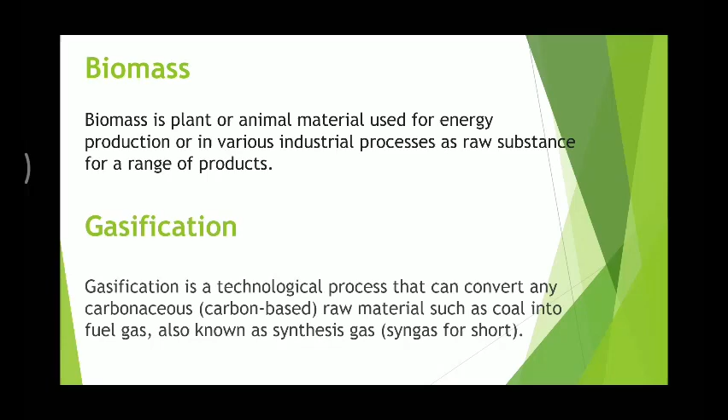Biomass gasification. Biomass gasification means incomplete combustion of biomass, resulting in production of combustible gases consisting of carbon monoxide, hydrogen, and traces of methane. This mixture is called producer gas. Producer gas can be used to run internal combustion engines.

Both compression and spark ignition engines can be used; it can be used as a substitute for furnace oil in direct heat applications and can be used to produce methanol in an economical way. It is an extremely attractive chemical which is useful both as fuel for heat engines as well as chemical feedstock for industries. This gas is a low heating value fuel with a calorific value between 1000 to 1200 kilocalorie per normal meter cube.

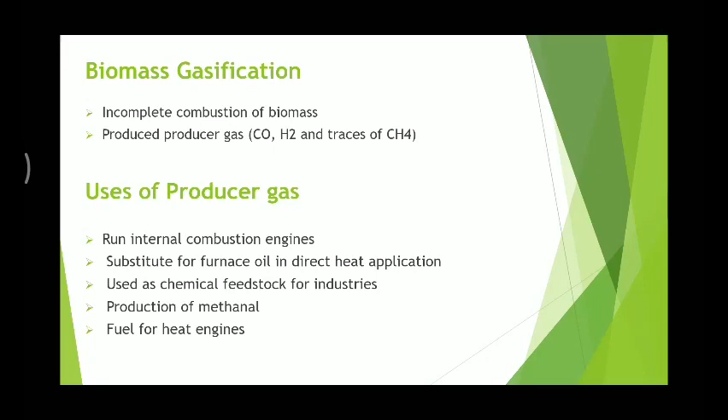The main reactions or processes which occur inside a biomass gasifier are drying, pyrolysis, oxidation, and reduction. Drying. Biomass fuel usually contains moisture. When it is heated to about 100 degrees Celsius, the moisture is converted into steam. Pyrolysis. Pyrolysis is the heating continuously without supplying any oxygen. As a result, the biomass is decomposed or separated into solids, liquids, and gases.

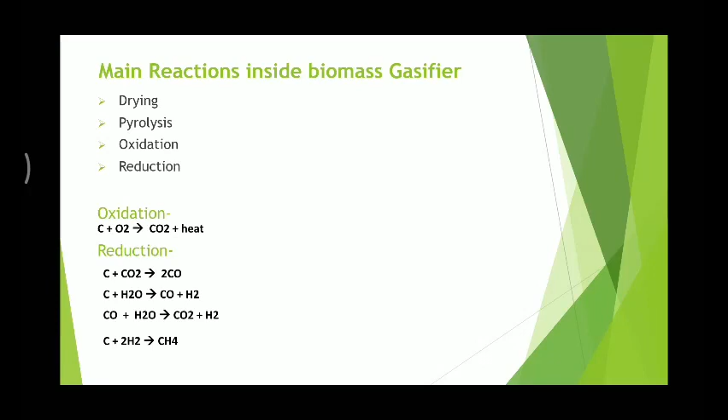Oxidation. Air is introduced into the gasifier after the decomposition process. The reaction is carbon plus oxygen to give carbon dioxide and heat. Reduction. Reactions for reduction are like carbon plus carbon dioxide to give carbon monoxide, carbon plus water to give carbon monoxide and hydrogen, carbon monoxide plus water to give carbon dioxide and hydrogen, carbon plus hydrogen to give methane.

Now let's talk about types of gasifiers. There are generally four types of fixed bed gasifiers used in biomass gasification. They are updraft gasifier, downdraft gasifier, open-top gasifier, and closed-top gasifier. For the shortage of time, here we will talk only about updraft and downdraft gasifiers.

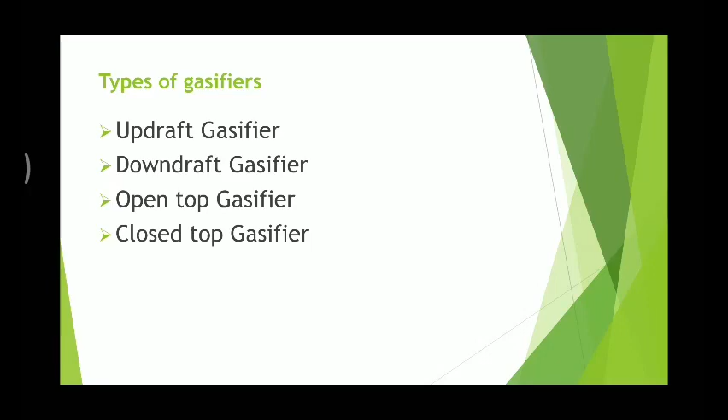Updraft gasifier. In this, air is taken in at the bottom and the gas leaves at the top. Near the grate at the bottom, the combustion reactions occur, which are followed by reduction reactions higher up in the gasifier. In the upper part of the gasifier, heating and pyrolysis of the feedstock occur.

As a result of heat transfer by forced convection and radiation from the lower zones, the tars and volatiles produced during this process will be carried in the gas stream. Ashes are removed from the bottom of the gasifier.

The major advantage of this type of gasifier is its simplicity, high charcoal burnout and internal heat exchange, leading to a low gas exit temperature and high equipment efficiency. And this gasifier can be operated with many types of feedstocks like sawdust, cereal waste, etc.

And the one major drawback is the oxygen leakage, which can be due to channeling in the equipment, which creates dangerous and explosive situations. So it is necessary to install automatic moving grates. Another problem is associated with the disposal of the tar-containing condensates that result from the gas cleaning operations. But this can be solved if the gas is used for direct heat application, in which case tars are simply burnt.

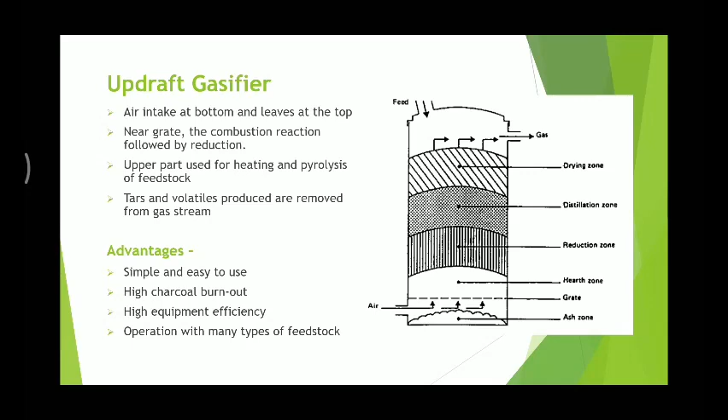Now let's talk about downdraft gasifier. A solution to the problem of the tar entrainment in the gas stream has been found by designing a co-current or downdraft gasifier, in which primary gasification air is introduced at or above the oxidation zone in the gasifier. The producer gas is removed at the bottom of the apparatus so that the fuel and gas move in the

same direction. On their way down, the acid and tarry distillation products from the fuel must pass through a glowing bed of charcoal and therefore are converted into permanent gases like hydrogen, carbon dioxide, carbon monoxide, and methane. The main advantage of downdraft gasifier lies in the possibility of producing a tar-free gas suitable for engine applications.

Because of the lower level of organic components in the condensate, downdraft gasifiers suffer less from environmental objections than updraft gasifiers. A major drawback of the downdraft equipment lies in its inability to operate on a number of unprocessed fuels. A low-density material gives rise to flow problems and excessive pressure drop, and the solid fuel must be pelletized or briquetted before use. Downdraft gasifiers also suffer from the problem associated with high ash content to a larger extent than updraft gasifiers.

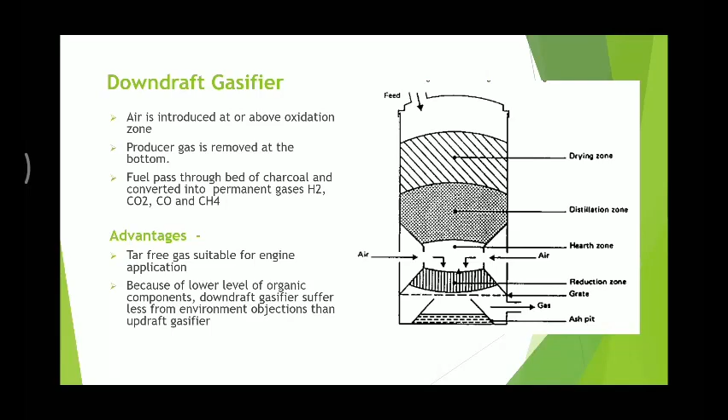Now let's talk about biogas. Biogas is the mixture of gases produced by the breakdown of organic matter in the absence of oxygen. It primarily consists of methane and carbon dioxide. Biogas can be produced from raw materials such as agricultural waste, manure, municipal waste, plant material, sewage, green waste, or food waste. Biogas is a renewable source of energy. In India, it is also known as gobar gas.

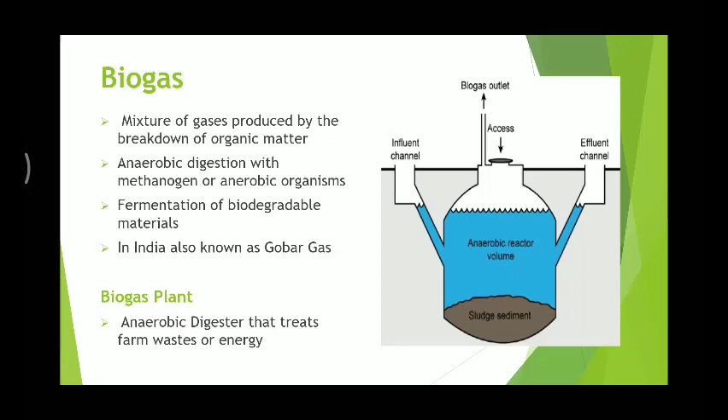Biogas plants. Biogas is produced by anaerobic digestion with methanogens or anaerobic organisms, which digest material inside a closed system, or fermentation of biodegradable materials. This closed system is called an anaerobic digester or biodigester or bioreactor. Working of biogas digester. In a biogas digester, microorganisms transform biomass waste into biogas. Tanks should be properly sealed with no oxygen and warm temperature. Produced biogas is cleaned using a biogas scrubber and H2S is removed to use it efficiently.

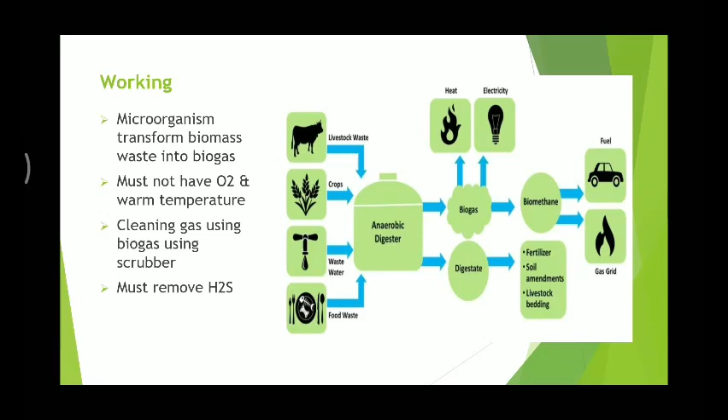Advantages of uses of biogas for cooking and heating. Biogas burns very cleanly and produces fewer pollutants during cooking than any other fuel except electricity. Biogas provides instant heat upon ignition. No preheating or waiting time is required. Most biogas burners are able to regulate the flow rate to turn down fire power from high heat to small low heat for simmering. Biogas can be used for lighting as well.

The byproduct from the digester can be used as fertilizer. Biogas is a renewable fuel that is carbon negative. Unless there are leakages in the system, burning biogas in a cook stove releases less greenhouse gas than if the dung was left on the ground to decompose naturally.

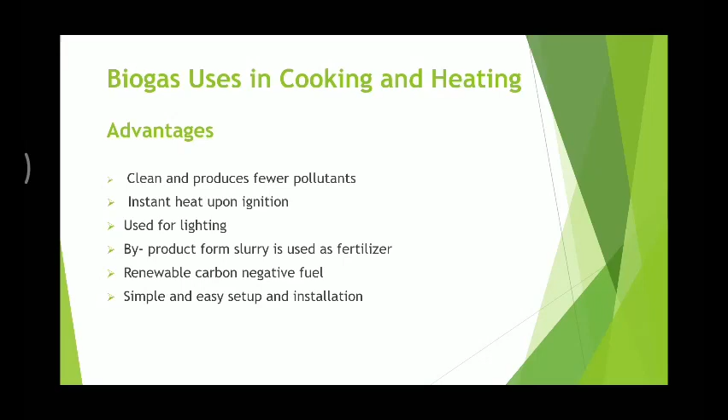Now let's look at some disadvantages of biogas. High investment cost for digester, tubes, gas stove and pots. Biogas can increase the workload of women, especially in rural areas, as it is often made their task to run the digester. It is quite a physical burden to move all the biomass feedstock and water to feed the digester. Also, the slurry must be removed and taken to the field at regular intervals.

It is not viable for elderly or sick people to run a biogas plant on their own if they don't have labor to assist them in the maintenance of the digester. Cooking with biogas requires a change of cooking habits, which might prevent adoption. Biogas is difficult to store and to transport to other consumers.

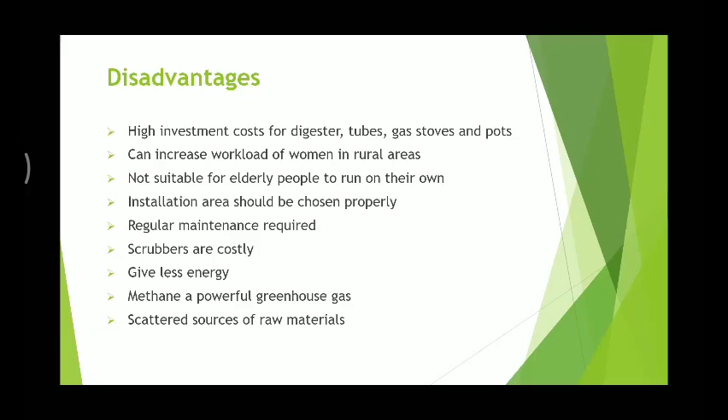India and biogas. It can be used in homes for cooking and heating, but it is not successful in India because in villages it is found that burning cattle dung cake is more efficient than producing biogas. Cow dung gives energy of about 4000 kilocalories, but biogas gives energy of about 200 kilocalories. Also, people in rural areas can sell their cow dung, but cannot sell their biogas. It also requires about 30 liters of water every day, and for places where there is scarcity of water, it becomes a mess. Once India was ahead in producing biogas, but now China is ahead of India.